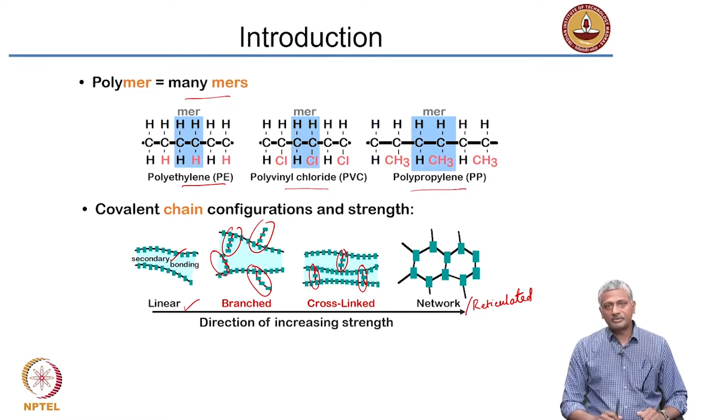Now, the number of individual units that link together to form a chain contribute obviously to the molecular mass or molecular weight of the polymer. So molecular weight is nothing but mass of a mole of chains. So you have several chains together. If you take 1 mole of those, you get the overall molecular mass of the material.

The individual chains may have smaller number of units together or larger number of units together. But if you take one mole, it will be composed of several chains of different lengths. So, you can take the molecular weight as the average represented by all those chains together.

The engineering properties of these polymers depend a lot on the molecular weight. The tensile strength generally increases with increase in molecular weight. So, as the molecular weight goes up, tensile strength also goes up. Why is that? Because just imagine a three-dimensional network of these chains. If you have longer and longer chains, there is a good chance that these chains are anchored or interconnected.

Even though they may be linear or branched, they need not be cross-linked or networked, but what will happen is they will start intertwining with each other because these are long chains. So, this intertwining will tend to increase the strength that you can get out of this material. So, longer chains are entangled or anchored better. So, tensile strength obviously depends on molecular mass.

The other factor that is very important that governs the response to temperature as well as the mechanical properties is the crystallinity of the polymer. Apart from molecular weight, the other important parameter that you need to think about is the crystallinity. Now, why are we talking about crystals when it comes to organic materials? A crystal is nothing but an ordered arrangement of atoms, right?

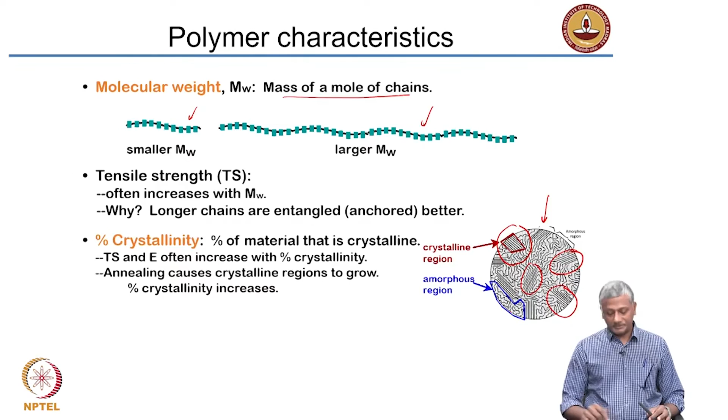Now, again, coming back to the same concept, molecular weight is a function of the chain length. The number of units linked together in a chain will determine the molecular weight. Since you take a bunch of these chains together, you can either take a number average or a weight average. What do you mean by a number average? Supposing the number of units in a chain equals 20, 30, 40, etc. in different chains, you can say the molecular weight is defined as the number of units on an

average in this polymer. Otherwise, you can take individual weights of the chains and then take a weight average of the polymer. So, that is how you define the molecular weight of the polymer. And the degree of polymerization is nothing but how many units are joined together. So, when two units are joined, we call it a dimer. Of course, a single unit is a monomer.

Three units is a trimer and so on. Right. So, polymer simply is an extension of the number of units that you have. So, degree of polymerization just represents the number of units that you join together.

Interestingly, you can control the properties that you get out of these polymers by controlling the number of units that can join together. And this is usually done during the processing of polymers by application of temperature and pressure. And of course, creating the right level of alkalinity in the system. Of course, we are not going to talk about that here, but just keep that in the back of your mind, that you can actually process polymers to get different levels of polymerization.

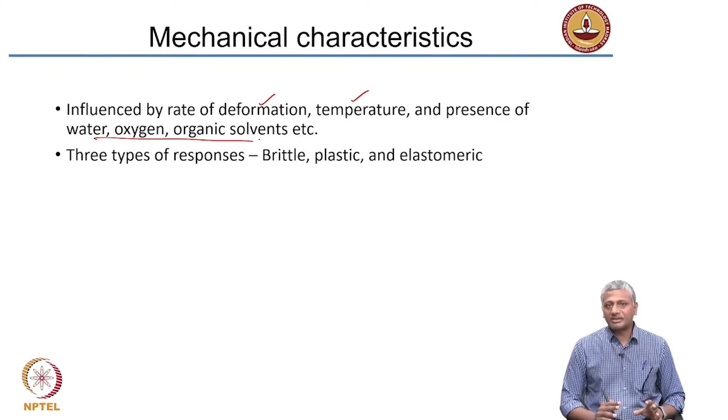Now, why is the rate of loading important? Right, we talked earlier in the concrete chapter about creep. Creep is the response to sustained loading. You continuously load a material for a very long time, you will see that it continues to deform, okay, depending upon its characteristics. It's not so much a problem in metals. In concrete, it can affect performance of concrete structures, but in polymers, the creep can be significant. Creep is a major problem in terms of polymeric behavior.

Because most polymers are not extremely stiff, they don't have a very high modulus of elasticity. As a result of that, they will be subjected to a large amount of deformation when there is a sustained load on them. Okay? Now, based upon the mechanical response that these materials give when you apply a load and test the deformation, you can get three different types of behavior. We call it brittle, plastic, and elastomeric behavior.

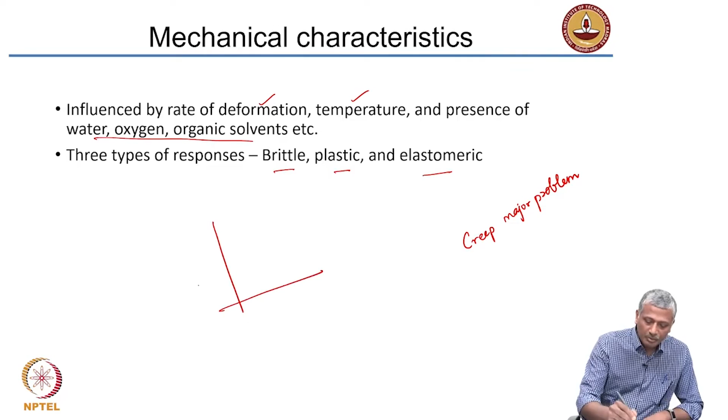Of course, we didn't talk specifically about this with respect to concrete. In steel, you would have come across, of course, the strain hardening type of behavior that steel exhibits when you subject it to a tensile test. In concrete, if you plot the stress versus strain of concrete, you will see that mostly it is a non-linear sort of a behavior, and we call that a strain softening behavior. Of course, this is a subject of a slightly different order. Maybe when you do an elective in concrete technology, you will probably look at all these aspects.

So, this is a concrete behavior. It's called strain softening. So, we have some linear portion, but mostly non-linear. It reaches a peak and then there is a drop, right, and then material continues to deform at lower load levels and then finally breaks apart. So, that is called a strain softening behavior, as opposed to steel, which exhibits strain hardening. Okay. After yielding, there is an increase in the amount of stress as the strain increases, and that is because of internal rearrangement, movement of dislocations and so on. Let us not get into that detail here. Okay. So, polymers exhibit responses that are brittle, plastic and elastomeric. So, for the most part, a brittle response simply means that sudden failure happens, right.

Plastic response means that there has got to be a plastic flow or a long yielding before it breaks. An elastomeric response, which we typically see with rubber, is that it exhibits a very high level of strain at very low levels of stress. So, let us look at these behaviors in just a minute.

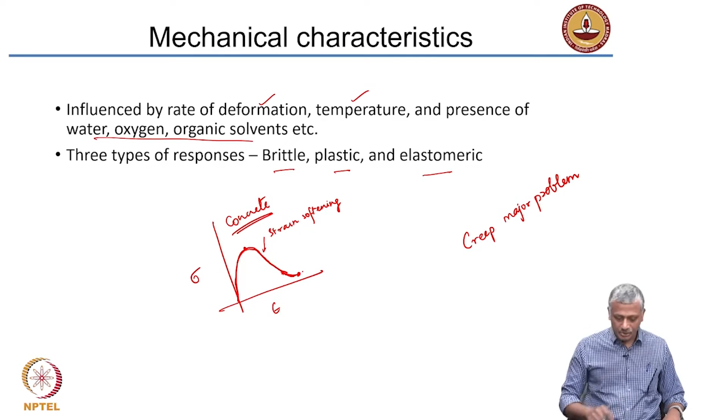Mostly what you will see is this kind of behavior is exhibited by highly cross-linked polymers as well as networked polymers. So, the higher the degree of order in the polymers, the more brittle they become. It is easy to imagine because these are highly connected structures. So, if you have to deform that, you may have to break the bond.

On the other hand, when you talk about linear or branched polymers, you have sufficient pliability and these chains can move past each other, and because of that you get a lot of plasticity or flow from the linear and branched polymers. On the other hand, for cross-linked and reticulated materials, as you near failure, the bonds between the atoms will start breaking. As a result, you get a brittle failure.

Let us see what happens in a linear and branched polymer. Now, in the case of linear and branched polymers, there are amorphous regions and then there are crystalline regions. In some regions, the branches or the linear chains are arranged quite nicely. In other regions, they are entangled and do not really have a good shape. So what happens now?

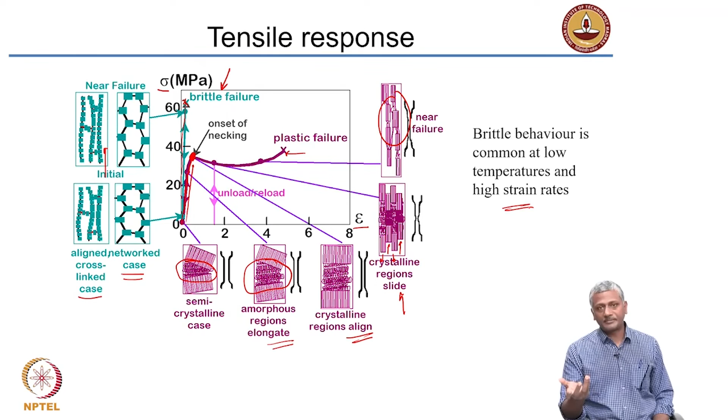Now, when you deal with common polymers, let us say your water bucket, you will see that with multiple uses, the bucket starts cracking. Why does it start cracking? It is because the material has become more and more brittle in response to age, age implying exposure to ultraviolet radiation. That is another aspect that can change the properties of the polymer significantly.

But then, as far as tensile response is concerned, brittle behavior can be commonly observed in low temperatures and at high strain rates. Again, applying this to the example of pavements or roads where bitumen is used, if the bituminous pavement serves in a condition where temperature can change significantly between 30 to 40 degrees Celsius all the way to negative temperatures, what will happen in that case?

When you go to negative temperatures, the behavior of asphalt will become very different. It will have low temperature thermal cracking, or brittleness will be introduced, and there will be cracking in the pavement because of the cracking of the polymer, that is the bitumen. Okay? So, all these have practical connotations. Whatever you learn in the basic understanding of construction materials will have connotations to how these materials actually behave in real life applications. Okay.

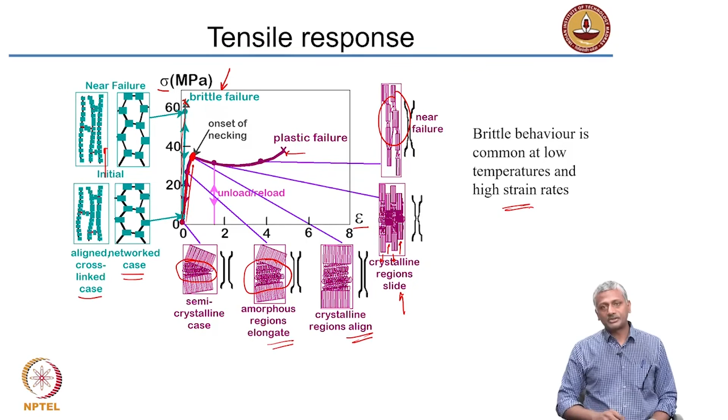Now, we talked about the fact that in the case of a linear and branched polymer, you have a slow alignment of the polymer chains. Okay. Now, what if you take this polymer and do this alignment process before and then subject it to loading? In metals, in steel especially, you would have talked about a concept called cold working. So what is done in cold working? You have your steel and you are basically stretching it and increasing the extent of strain in the material so that it overcomes the yielding, and then you unload. So the next time that you load it, you directly make the material enter the strain hardening region.

Now similar to cold working, there is a concept called drawing in polymers. So drawing is basically stretching the polymers prior to the use. So what you end up doing as a result of this is that you make the material stronger and stiffer. You increase the elastic modulus, you increase the tensile strength. However, just like cold working in steel, the effect of drawing on ductility is negative. You make the material less ductile. Please remember, the cardinal truth in most materials is that when you increase the strength, you will generally compromise on the ductility. You will be reducing ductility when strength increases.

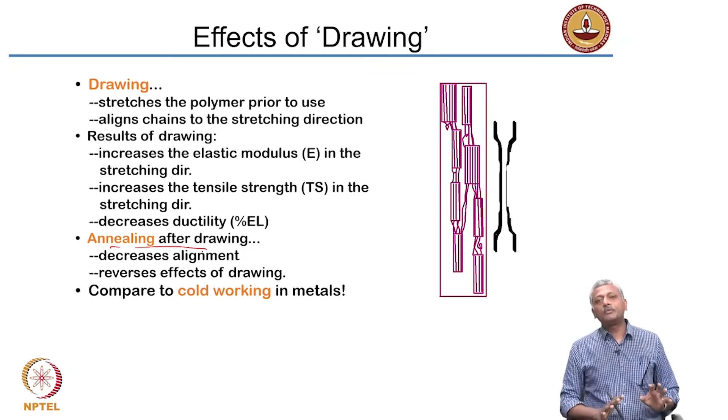Okay. Again, in polymers, you can also do annealing after drawing, that means heat treatment after you do the stretching. That will tend to remove some internal strains, and that may tend to reverse the effects of the drawing, and that may increase the extent of ductility you can get from these systems. But for polymers, we are not really that highly worried about ductility as we are with steel.

Okay, what about elastomeric? Again, the brittle and plastic have been plotted here just for an example to show you the stress levels. But if you look at the elastomeric case, for example, when you have amorphous chains that are kinked and heavily cross-linked, like in rubber, now, if you increase the load, the strain increases significantly. There is an enormous increase in the strain for very small increases in the stress. And this deformation that you see, increase in the strain, is actually reversible. So, when you unload, the material will go back.

So as the material goes up like this, if you unload at this point, it will come back. It may not come back across the same path. It may exhibit what we call hysteresis, but it will come back to the point 0. That means it will have no deformation when you remove the load. So, there is no plastic flow happening here, but there will ultimately be failure when you straighten up the chain significantly and then the chain starts rupturing. So, vulcanized rubber is a cross-linked polymer; there you are producing basically an elastomeric material which exhibits very high levels of strain at low stress levels, and these strains are recoverable, reversible.

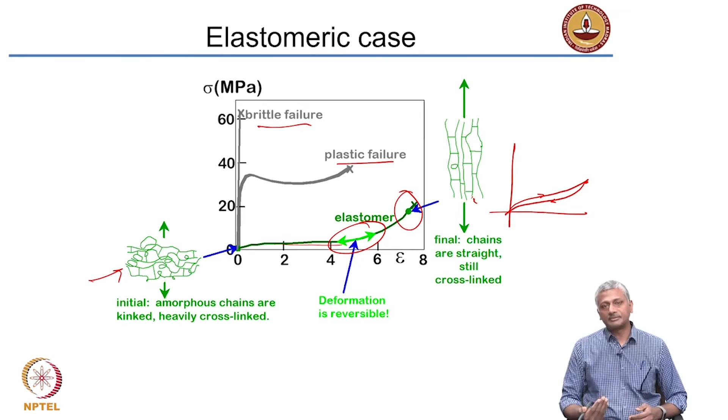Right. So, we looked at mechanical behavior of polymers. Now, let us talk about another important characteristic, that is the thermal behavior. Most polymers which have crystalline and amorphous regions would exhibit two characteristic temperatures. You will have a glass transition temperature and a melting temperature. Now, just let us define this. Of course, melting is something that you are all familiar with. Melting simply means that the material becomes almost liquid like and starts flowing.

But a glass transition temperature is very interesting. So, what does glass transition temperature mean? Let us say you have a material at room temperature which is extremely solid, a real solid, almost an elastic solid type material.

When this material undergoes an increase in temperature, at one particular temperature, it may start becoming more deformable. And then you continue to heat the material; at one particular temperature, it may start becoming almost liquid-like. So, what has happened is there are two transformations that have taken place. One is from an elastic solid to a viscoelastic solid. That means it starts flowing; it is still solid, but it starts flowing.

But the other, much higher temperature, is the melting temperature, where this viscoelastic solid has become a liquid. Of course, materials usually exhibit several ranges of transformations, but these are the two important transformations. So, glass transition means that the material changes from an elastic or glassy solid to a viscoelastic solid. That is the glass transition temperature. Again, it has got practical connotations.

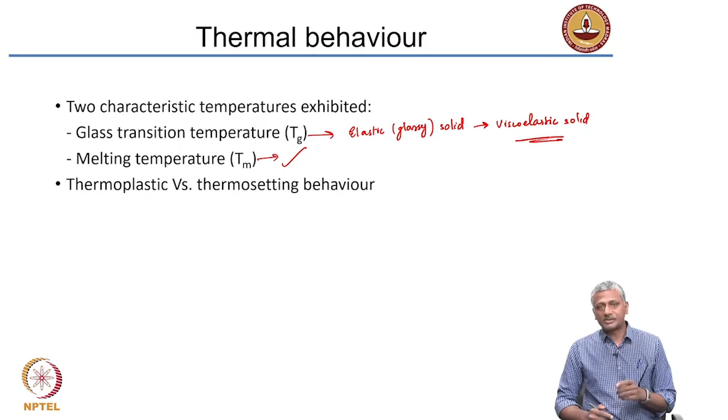Again, something very commonly observed when you take a PET water bottle, empty the bottle and fill up hot water in it. What do you see happening? You see that the material gets deformed. It's very easy to press the bottle, right? When you have cold water in it, the bottle is rather stiff and hard. But when you fill hot water in it, the plastic undergoes a change in its temperature. That's why you should not fill extremely hot water in regular plastic water bottles. There are specialized bottles available which are a lot more temperature resistant.

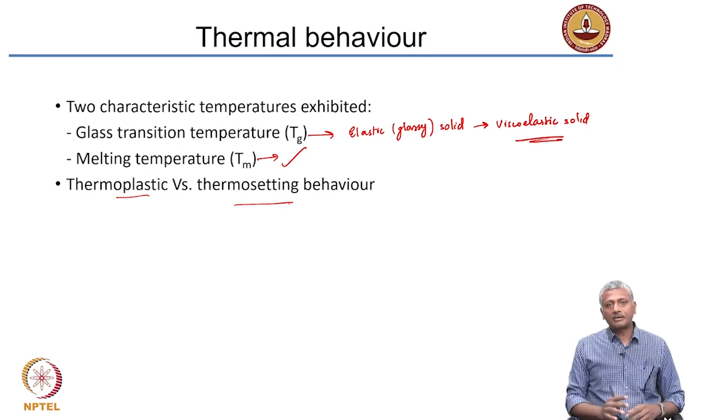Another behavior that you would have learned before is thermoplastic versus thermosetting behavior. Thermoplastic simply means materials that exhibit flow as you increase the temperature. Thermosetting behavior relates to those materials that don't show any change with an increase in temperature until a point where they simply burn off. So, those are the two characteristics exhibited by different types of polymers. Let's take a look at what type of polymer exhibits what characteristic.